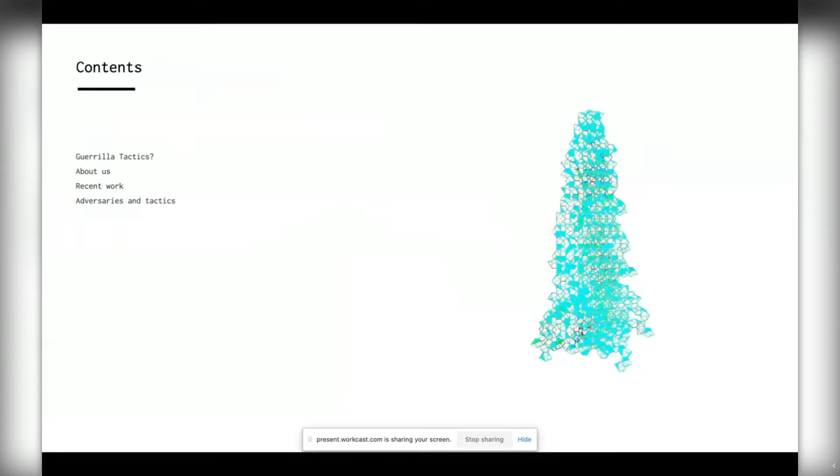Guerrilla tactics. There's a couple of definitions of guerrilla tactics. Wikipedia, the top quote, talks about avoiding head-on confrontations with enemy armies, instead engaging in limited skirmishes with the goal of exhausting adversaries and forcing them to withdraw. So we talk about what our adversaries are, but the RIBA, the bottom quote, has a slightly softer, more appropriate approach, talking about winning by collaborating, leveling up skills, pooling knowledge, and how digital relationships can transcend local networks. So there's a bit of both in there.

I'll flesh this out in a second.

Firstly, about us. Format Engineers are a relatively new practice, formed in 2014. We think we're slightly unusual in that we're structural engineers, but the various people here have backgrounds in architecture, mathematics, geometry, coding. For example, we've got one guy who works part-time for the software house McNeel, who publish Rhino, which a lot of you may know. We do lots of research, so we like to think we go beyond the narrow discipline of structural engineering.

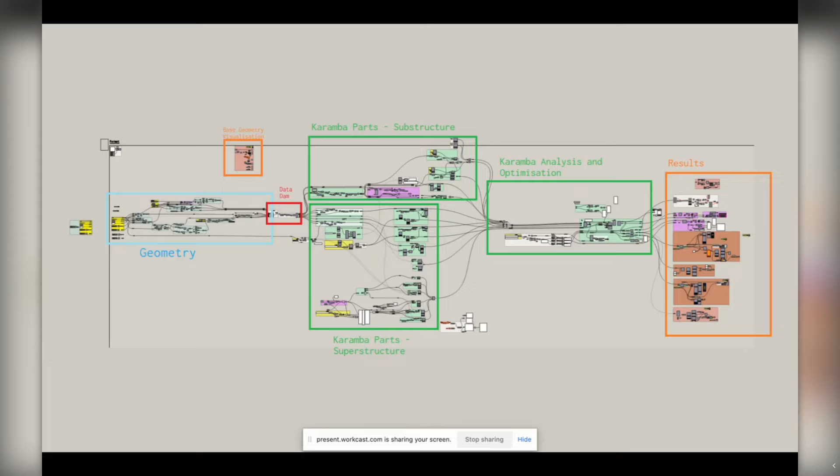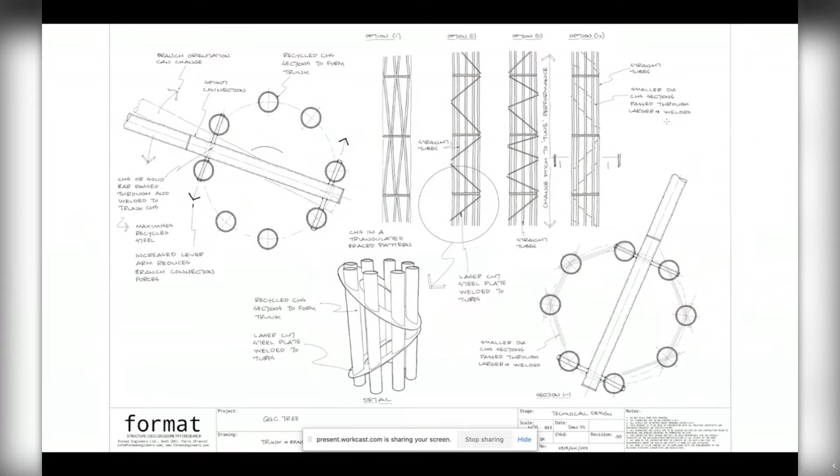But you'll also equally hear about first principle sketching and just disgorging the problems in your brain by the physical act of sketching. That's something we beat into people here. It's very, very important, it's not about jumping on the computer. I should also go back to the computer point and say, computing for us is not a philosophy, not a mindset, not an ideology, it's a tool. I lectured a bunch of architectural students yesterday, and I was ranting on about how computational design is not an ethos. It's a tool like a pencil, and it absolutely is. It just enables us to design better, leaner structures quicker and collaborate more easily.

And there's also hopefully lots of talk of practicalities. We pride ourselves on building things, and we pride ourselves on not just being the kind of engineers that say, oh, we do scheme and concept designs. No, actually we build the whole lot, because we're very keen that what we learn from building feeds back into the design process. So practicality is something which shoots through all of our work.

Just again, to set the scene, some of our recent work before I dive into the Guerrilla Tactics. Last year was quite an interesting year for us in terms of art. We were very lucky to deliver quite a lot of projects in quite a short space of time, and we'll talk about these in more detail.

Top left, Goodwood Festival of Speed. Top right, London Design Festival last year. Bottom left, the Tay Whale in Dundee, next to the V&A in Dundee. Bottom right, Marble Arch Place. So those are all things that we were lucky to deliver last year.

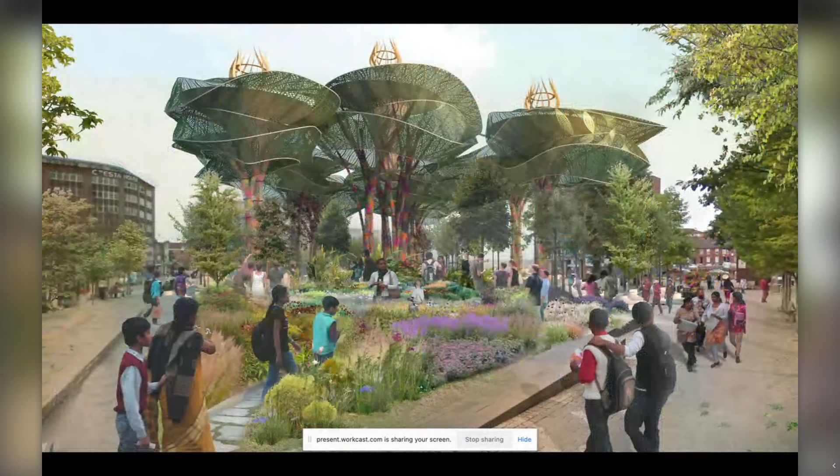We're currently working on a number of quite interesting art projects. I'm sure many people on this call may have worked on similar structures, but we're working on a series of structures for a UK-wide festival this year, which was originally dubbed Festival of Brexit - I think it has a more palatable name now. We're designing a number of enormous tree structures, located in Birmingham and Edinburgh, to reflect and illustrate biodiversity as well as urban diversity. We're working with a really nice team of people on those projects.

We've recently completed a very visual demonstration of climate change ahead of the COP26 conference, where we designed a sinking house. It's a sleight of hand - this is anchored next to the historic Pulteney Bridge in our hometown of Bath. All the flotation calcs were us, all the calculations proving this wouldn't float down the river and crash into lots of boats, all by us.

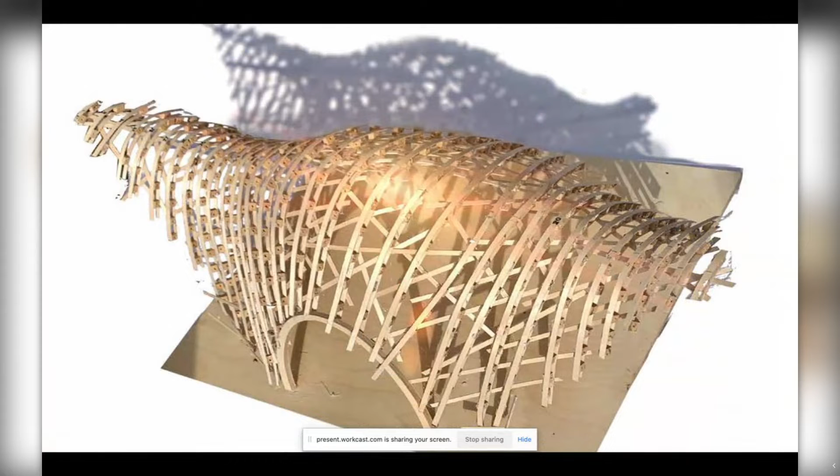Timber lattice shell at Westonbirt Arboretum with architect Piers Taylor. We do our own footbridges - we're working on a number of contemporary bridges at the moment. I think all of them are designed in-house, actually. Oh, there is one with an architect - I'll take that back.

We don't just work on art projects, we work on a number of slightly more conventional projects, although they tend to have a twist to them or some unusual aspect. We work on a number of contemporary houses with long span cantilevers. We're working on a power station, for example, in the west of England - that's a huge project, again quite unusual shape. So we do tend to get involved in some quite interesting projects, which is something we're very proud of.

We're working on a series of huge advertising structures in Qatar ahead of the World Cup this year. We do a lot of staircase designs, which is actually a lot more sexy than it sounds, in that we do lots of work for a steel fabricator doing staircases, which is great because we learn a lot about steel detailing and we've learned a lot about dynamics. So from an outwardly relatively straightforward set of work, there's some really interesting conclusions in terms of automating this process and understanding dynamics in quite some detail, which we apply to some of the works of art that we do.

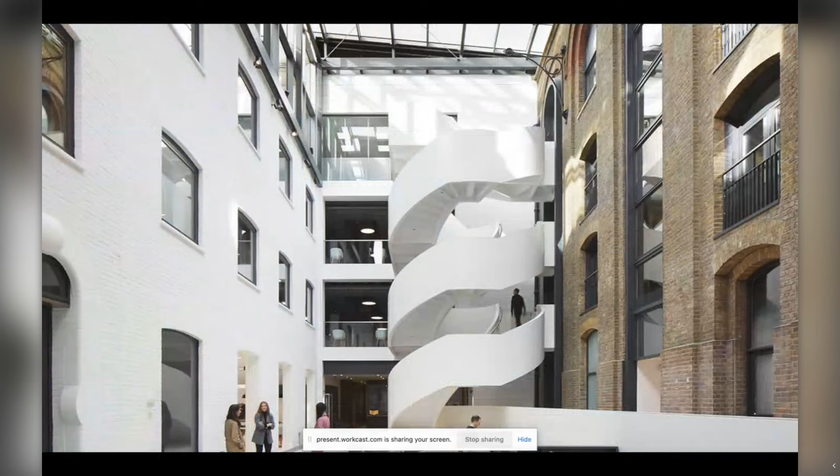There's another staircase to illustrate the point. We've done some work with English National Ballet recently on their stage sets. We've done a lot of work at Foundation Lafayette in Paris on various works of art there, and we've done a number of things at the Orange headquarters in Paris. A lot of these actually led to our office in Paris.

So, Guerrilla Tactics - just to recap. We talked about exhausting adversaries and forcing them to withdraw. We talked about leveling up skills and pooling knowledge and collaboration. And then this is the RIBA softer interpretation of this, and how digital relationships can transcend local networks.

So if in the context of this presentation, let's say adversaries are unusual materials - it could be the behavior of the material, or the structure is too complex to model. It could be how do we communicate, or it's too complicated to build, or quite often what happens is there's too little time to build it - that's a very common one in works of art. Some of the tactics we developed are developing our own in-house tools, developing a particular mindset, a very can-do mindset, techniques which simplify the build, and a smart workflow and collaboration.

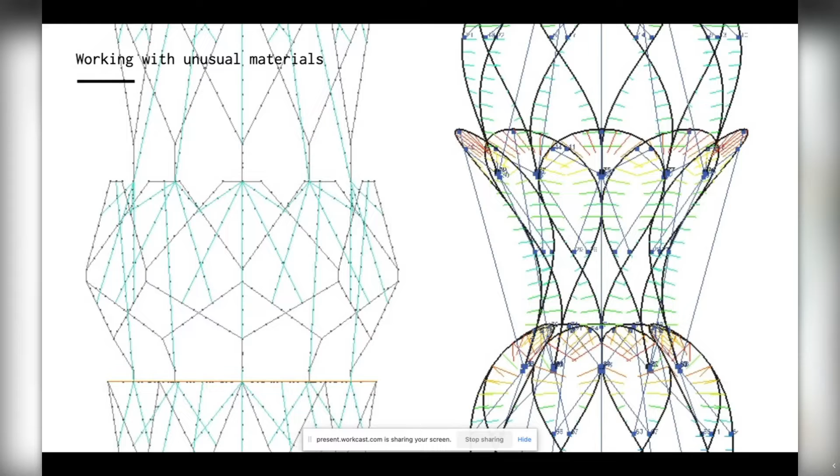So the first one: working with unusual materials. What I'll mostly do is use projects to illustrate this. A lot of the work we do stems from my colleague James's work at ITKE, where he was responsible for the Elytra Pavilion - this is at the Victoria and Albert Museum, but it was also moved to Shanghai and the Vitra campus. So we've developed a pretty good knowledge of carbon fiber.

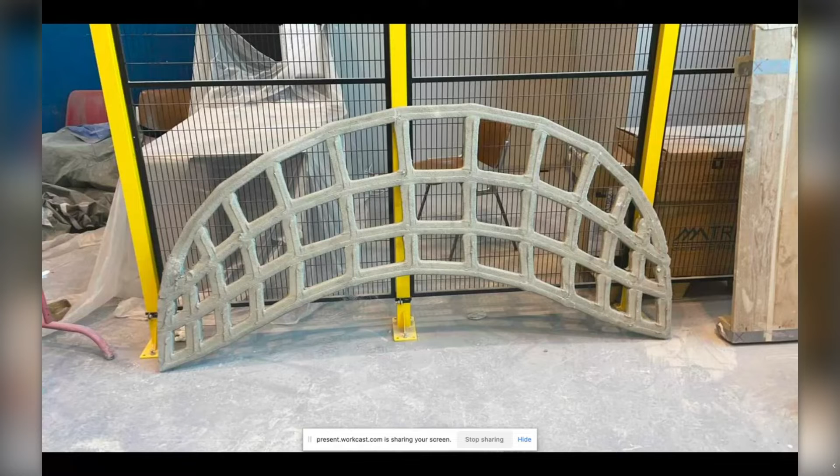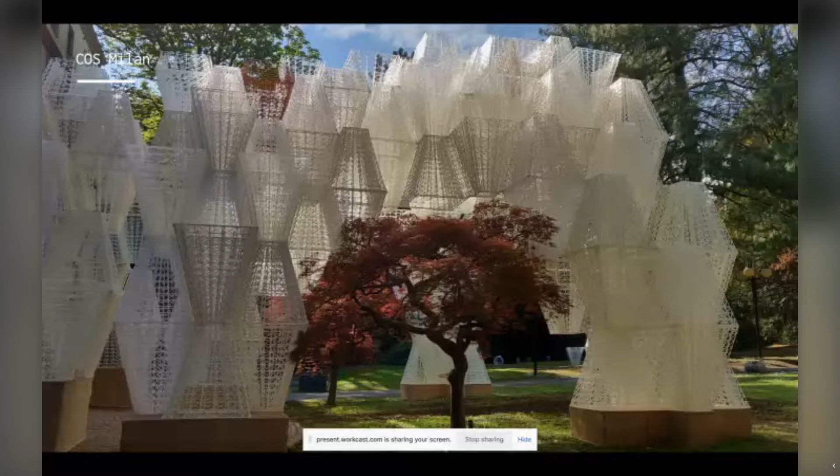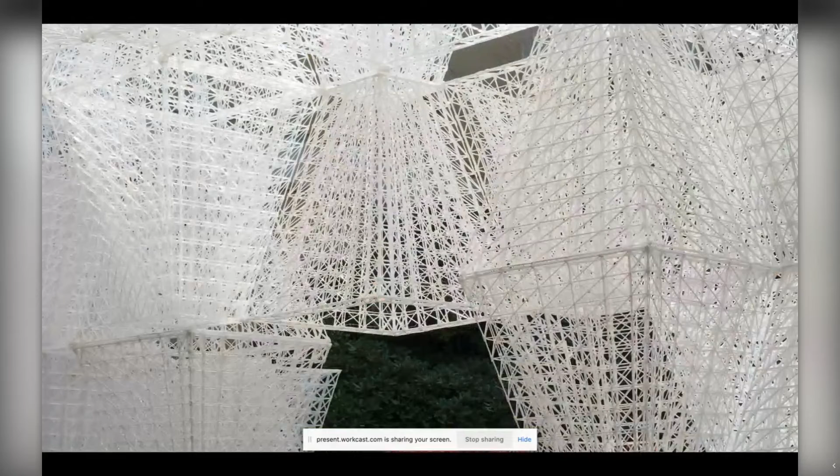But how do you deal with these materials? They're often not codified. One quick example of this was a project we did in Milan a couple of years ago - a 3D printed bioplastic pavilion. There's a bizarre statistic claiming it's the world's largest recyclable bioplastic structure, which is a nonsense statistic. But each of the structures is made from a series of baskets - flat 3D printed bioplastic elements which are then linked together. So you can see it's all flat elements here, making one whole.

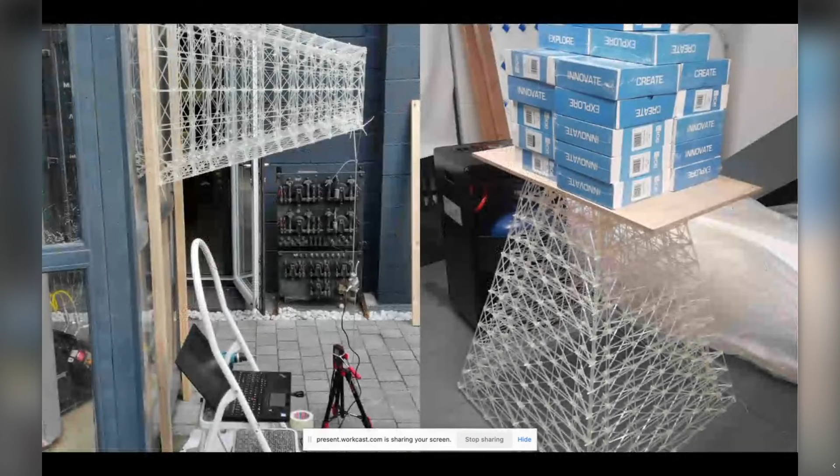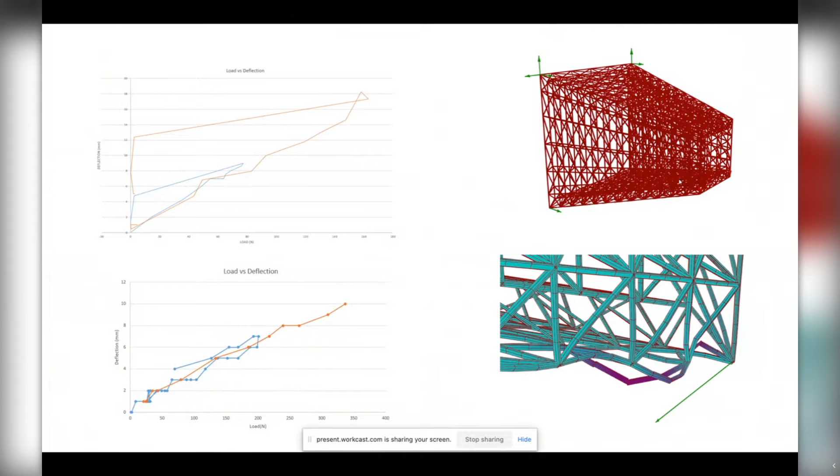So how do you deal with this? One way is the classic engineer's relatively low-tech testing approach - put in some strain gauges, measure the materials and how they perform as a system, load them, and gain data that way, which is what we did on this project. We were able to look at the performance of the structure, where it was likely to buckle, and how we would reinforce and deal with those elements.

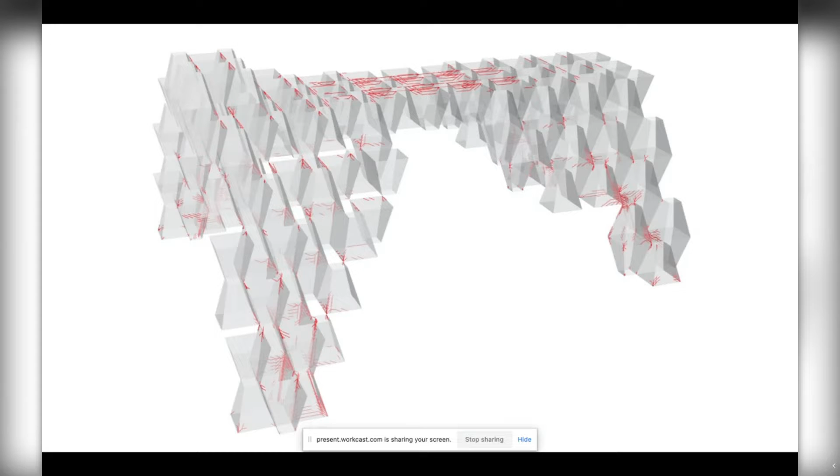But the essential gist of this is that, through computation - apologies, this diagram is hard to read - we were able to put every single member into our structure, and there must be millions of members here, just a large data set. By importing the geometry as a 3D model into computational scripting, you can analyze it and get results, then make decisions about the script, letting it automatically orientate members in different directions. The red elements are the ones that were failing - there's far fewer failing now, just by a simple flick of switches to orientate them differently, you get far less failure.

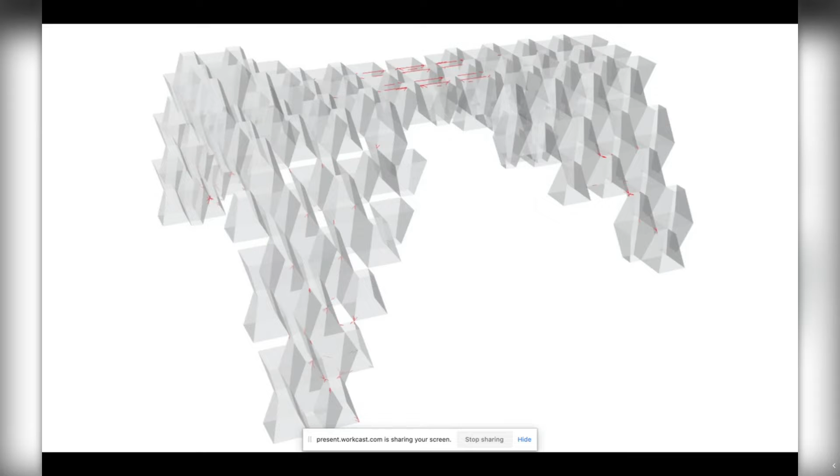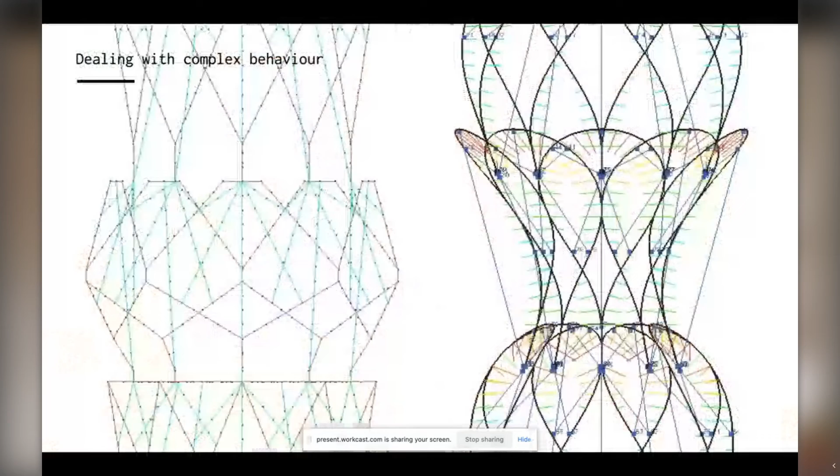So that's complex materials - digging down now to complex behavior. Some of these works of art are extremely complicated or don't obey the normal rules of beams, columns, etc. How do you mimic those? How do you simulate those with confidence?

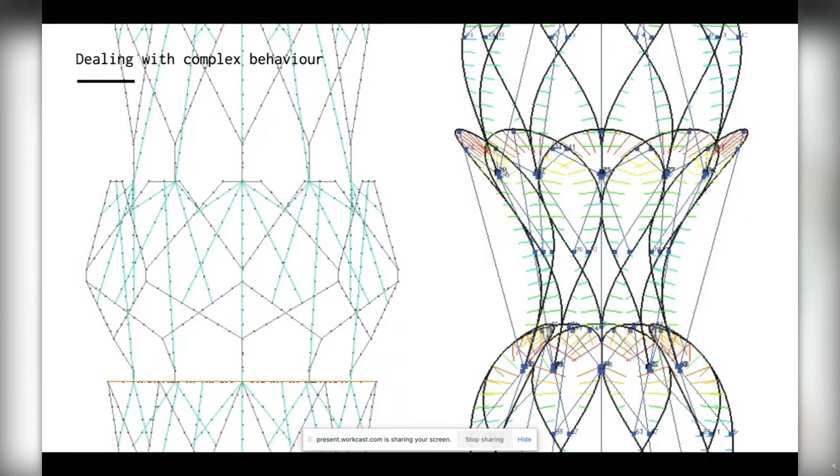One of the tools we've developed in-house, along with researcher Cecilie Brandt-Olsen in Copenhagen, is a toolset which sits on top of the Kangaroo plugin for Grasshopper, which itself is a plugin for Rhino. Apologies if this sounds like gibberish for some people, but essentially it's a way of simulating real-world physics in a digital environment.

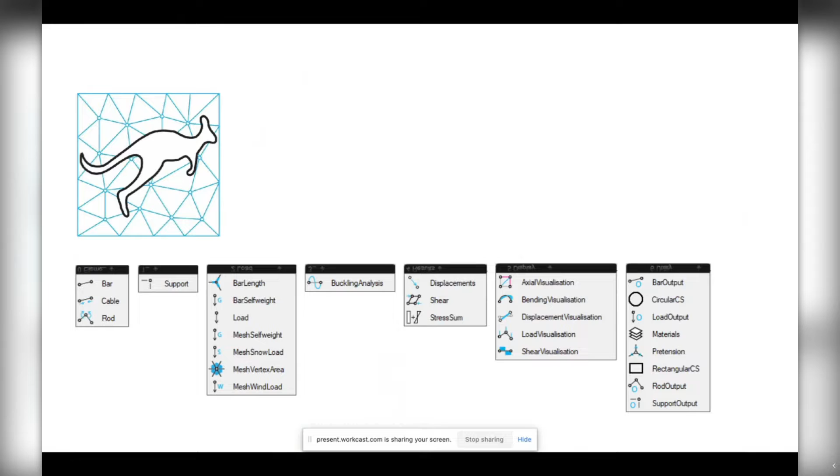Our plugin, called K2E, is essentially a structural analysis plugin. It lets us analyze very lightweight, very filigree structures using real-world physics, so we can look at things like the bending active behavior of an element, and what the bending stress is when it's pulled together. So very lightweight structures, and the first thing we ever tested this on was a structure at the University of the West of England.

A very simple timber pavilion, built a number of years ago - I think this was the first structure ever to use that plugin. It was a series of bent active plywood strips. How do you analyze the stress in those strips? Conventional engineering software struggles to do that, but ours doesn't. It instantly tells you what the pre-stress in those members is, and most importantly, what shape they will take up. So that was an important test, just one example.

We developed a tool to actually mimic complex behavior. Another example is where we've developed our own CFD plugins. There are a number of CFD plugins out there that enable you to check and visualize the effect of wind or a fluid upon a structure, but we developed our own on the back of the OpenFOAM open source movement. It enables us to check some of the more complex interactions between structural elements. I'll come back to this at a later stage.

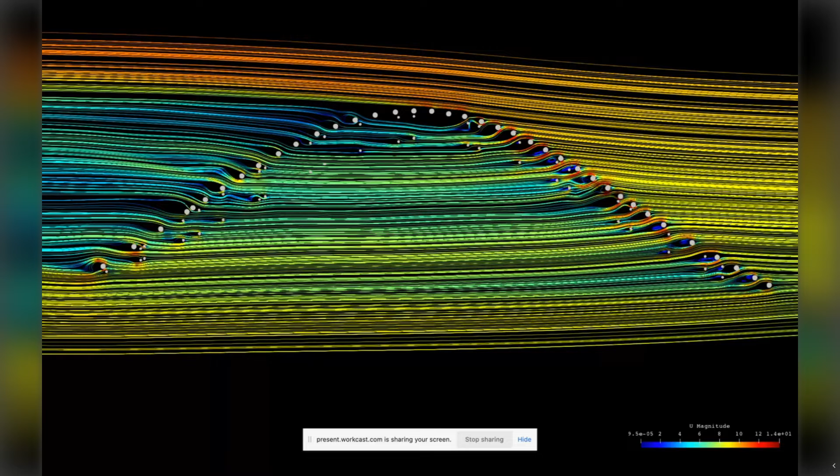So to illustrate one example of complex behavior and the tools we used to deliver it - in this instance, the same K2E plugin I've just mentioned - this is Goodwood Festival of Speed. For those who don't know it, every year there's a festival revolving around cars, motorbikes, anything fast, near the south coast of England, and they always have a big centerpiece structure.

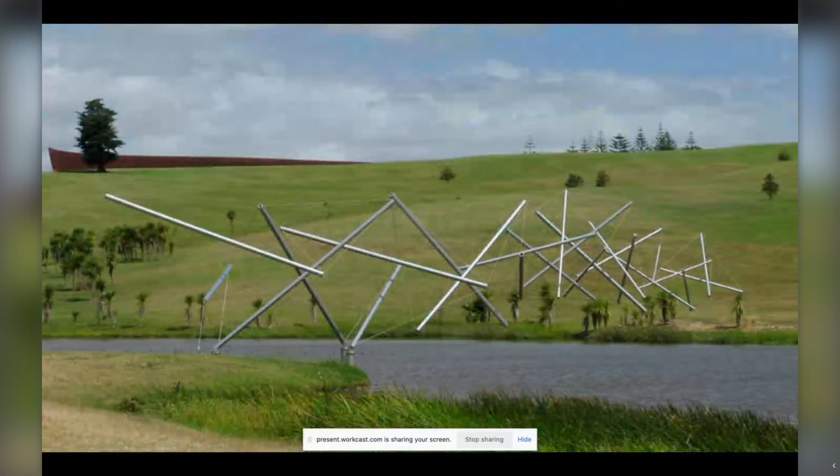This is the first time we've been invited to do it, and we were invited by Artists Unit 9, whose task was the world's longest tensegrity cantilever. So when we first started talking to them, the debate was: what is the world's largest cantilever? What do we have to beat? Now the one we found, and there could be more out there, was this one by an artist called Kenneth Snelson.

Kenneth Snelson was a pupil of Buckminster Fuller, and he did a number of tensegrity structures - we think this one is in the States. The joke is that we read the description on the internet wrongly - we thought this was 35 meters, so we were fixated on making our structure at least 36 meters, firmly the world's longest. It turns out this one was actually 25 meters, so we massively overshot. But hey, if you're going to do it, go for it.

And the original artist's instruction to us was something like this: a tensegrity structure which is a bit wibbly wobbly, a bit snake-like, undulates, has some randomness to it. We drew the scorpion on top to make fun, as you do.

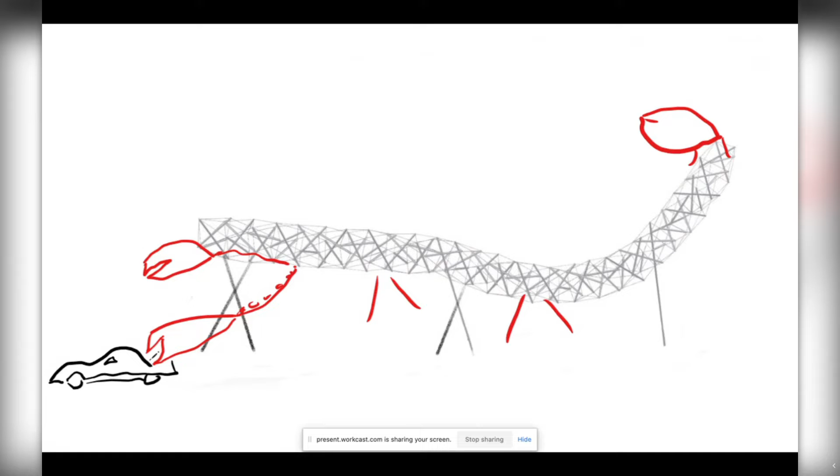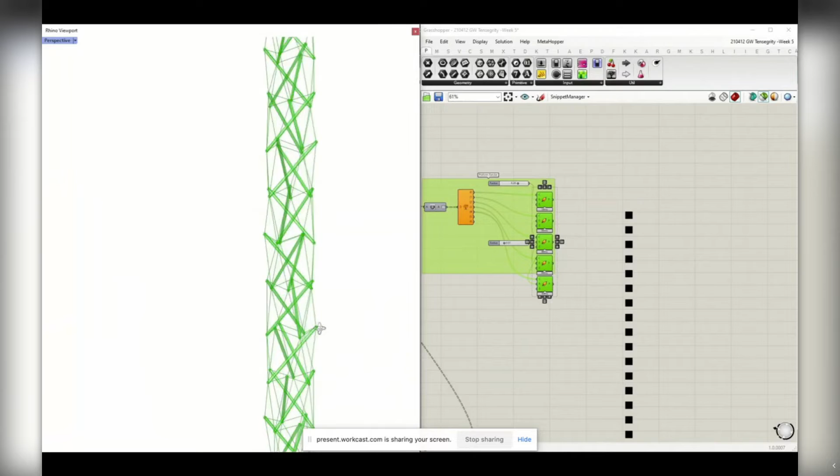This was quite a nice collaboration with an artist, and they gave us a lot of freedom to determine the shape. So we said, okay, it needs to be a cantilever - how do you simulate a cantilever? Using computational design tools, we're able to build up this tensegrity structure from a series of modules. We're able to relax it under its own self-weight, generate this structure, and add a certain amount of randomness and wibbly wobbliness until the artist was satisfied it was in line with their vision.

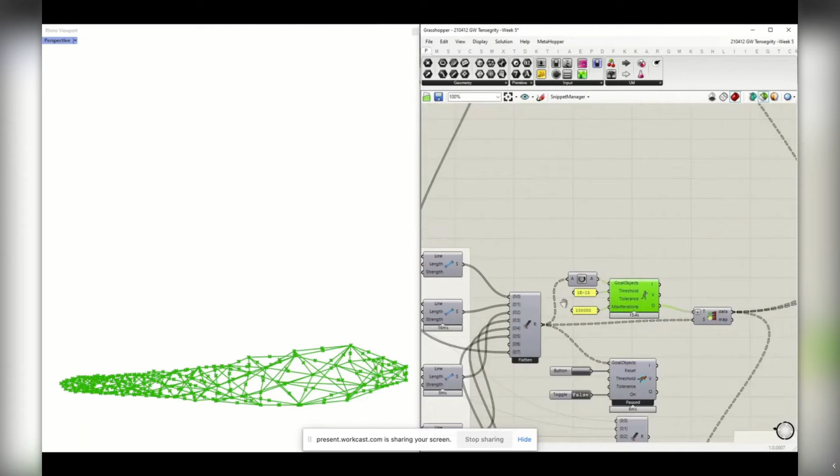There was then a whole series of figuring out how to make this - we lay it flat, and work out what kind of pre-stress is required to actually keep it in a stable configuration, what form it needs to be preset to. So a lot of this work is all about simulating those forms. This always gets lots of sniggers, apologies - but you allow this to generate form, and there you are. That's how you generate a tensegrity structure.

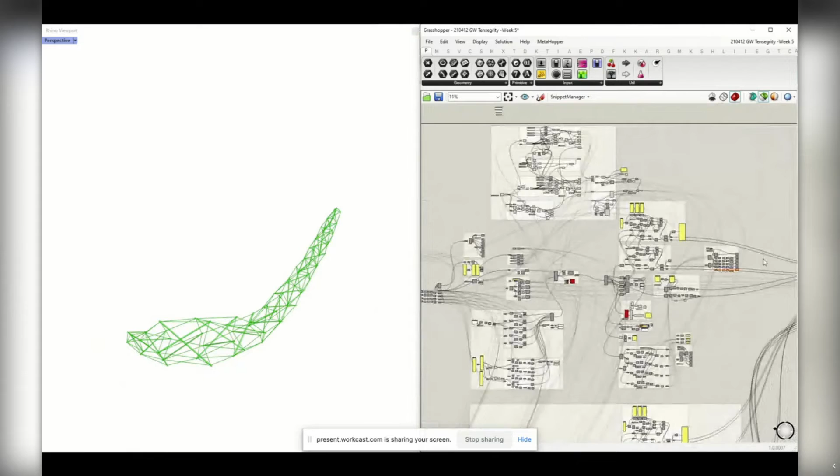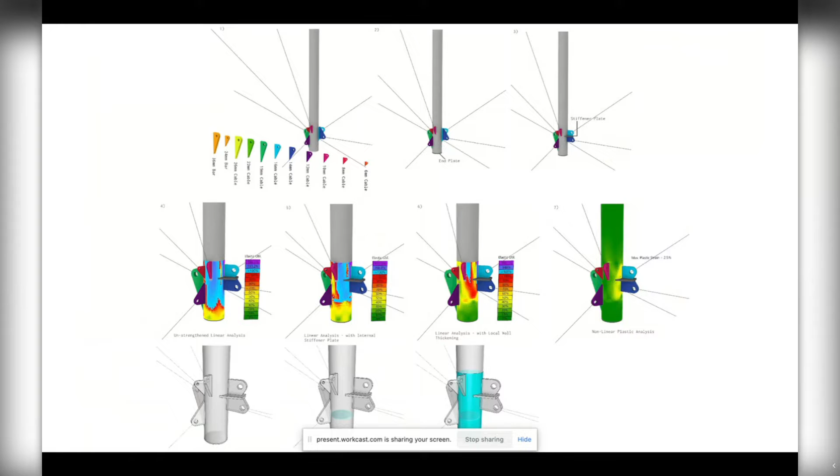One of the beauties of this, as we talked about with the adversaries, is not just complex behavior, it's lack of time. We were given a couple of months maximum to design the world's largest tensegrity structure, get it fabricated, and build it. One of the ways we did that was to automate all the joint calculations, all within the same scripting environment. So whatever parameters of the structure we changed, the joints would automatically recalculate - we could see the stress in the joints and play around with different configurations and add stiffness, all within the same parametric environment.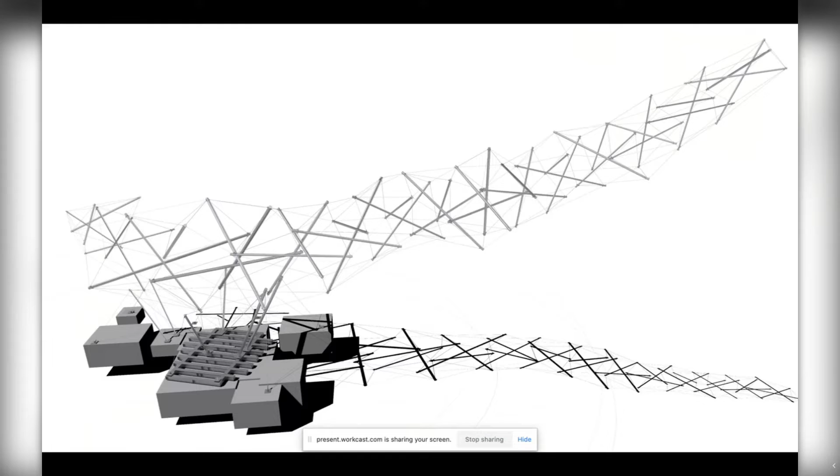And there are all the connections. All the fabrication drawings were done by us, and again were all spat out of the same script to keep it super quick. That was the final structure, the 3D image of the final structure. It started fabrication. That was all fine.

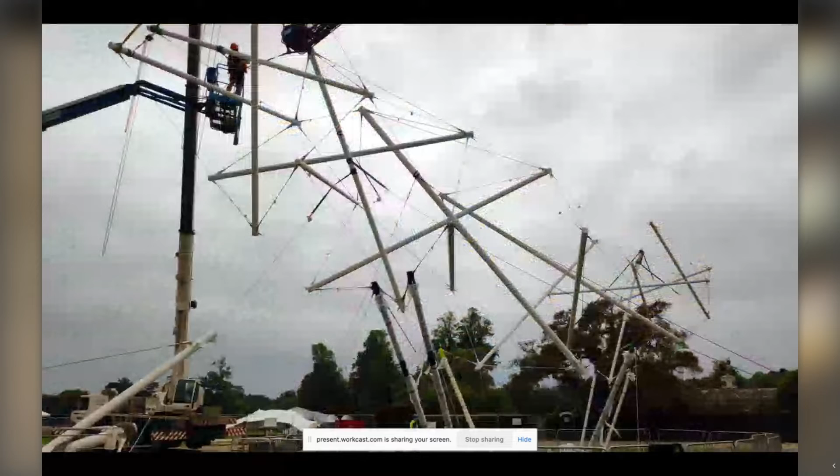That was all good. And then it got to site, and the contractor we were working with was Littlehampton Welding, who are a brilliant steel contractor. They do some amazingly complicated things. And I think this was the first instance we've had a phone call at the weekend from the contractor saying, help, we've never failed to build a structure. Here, we might well fail because the clock is ticking and we're trying to build this 3D object in empty space. How on earth do you do that?

So one of the things we've heavily invested in and researched is the use of augmented reality. Again, some of the tools fit within the computational design environment. There's a company called Fologram, an Australian company who do lots of work on this, who we've collaborated with before. So we put the Fologram system on a series of iPads, a laptop, and we went to site.

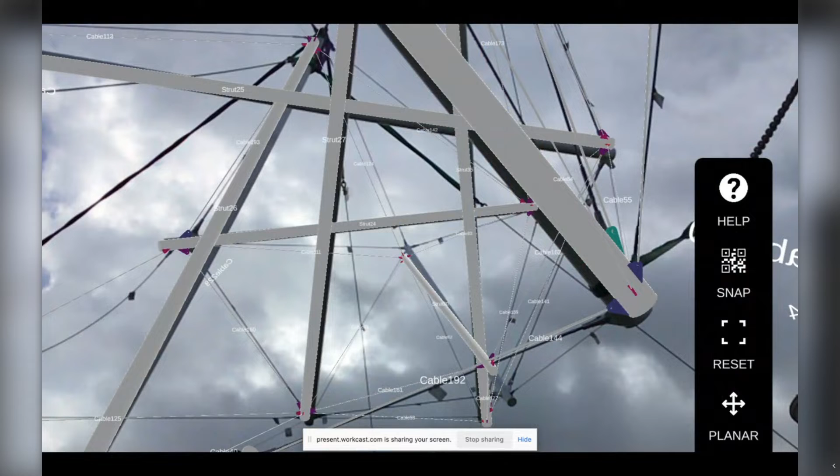So we were able to see the structure, how it should be in relation to how it was. That allows you to guide the contractor and say, well, that's not the right place, that should go over that one, that should go under that one, etc. And here you get a better sense of what that looks like. So the use of augmented reality here was absolutely crucial to getting this done on time.

That was the final structure. Some of the detailing. That's the festival. So it was great fun. It was quite stressful. It was a very quick program, and without the tools that mimic the complex behavior, and the tools to allow us to spit out things like fabrication drawings and joint detailing super quickly, it couldn't have been done.

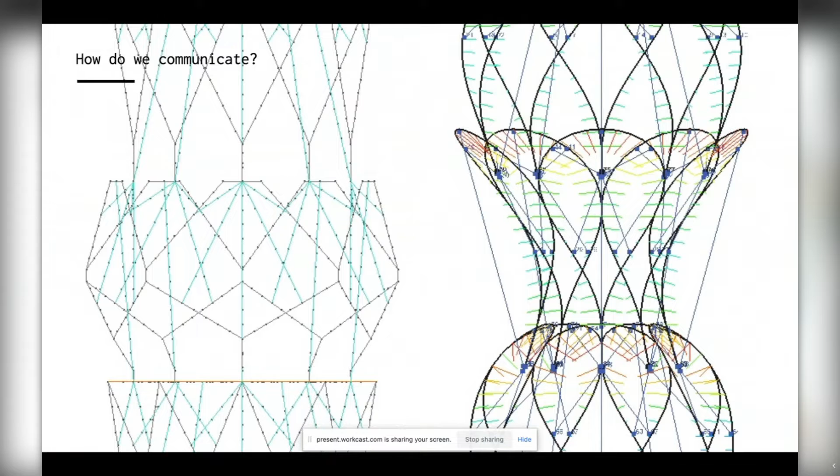How do we communicate? How do we talk with artists to get over this problem of, I mean, my God, this is complicated. Tell me, what's the best way of proceeding from a blank piece of paper?

One example is the Dundee whale I talked about before. This is working with an artist called Lee Simmons. What Lee wanted to do is stick to a very, very pure whale form. And what we wanted to do is put a structure in there, which is an actual two-way spanning structure. But it's very difficult to communicate in and sort of sketch options as to what the layout of that structure could be in 3D.

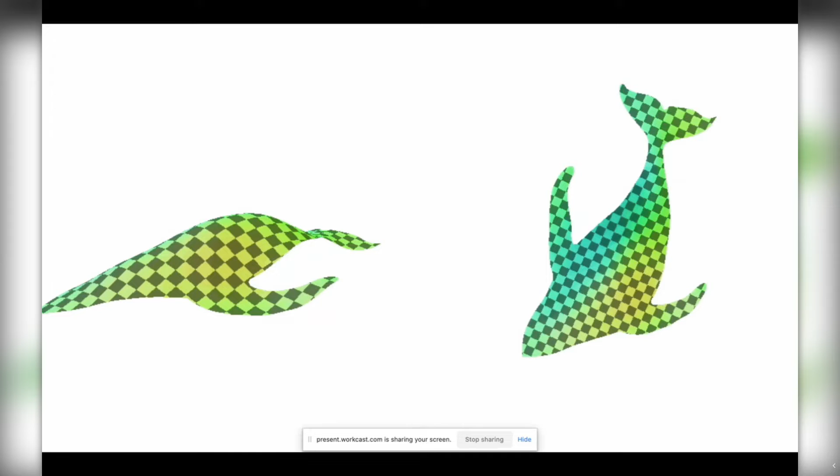So we used the work of a mathematician called Keenan Crane, who's at Carnegie Mellon, I think, to actually use his technique called boundary first flattening. There's one animation, this is probably a better one. Boundary first flattening enables somebody to draw on a 2D plane. So here, we would draw a grid, cycling through grids of structure that the artist would find acceptable, which then get translated into an accurate 3D object, where all the angles between the members are all preserved.

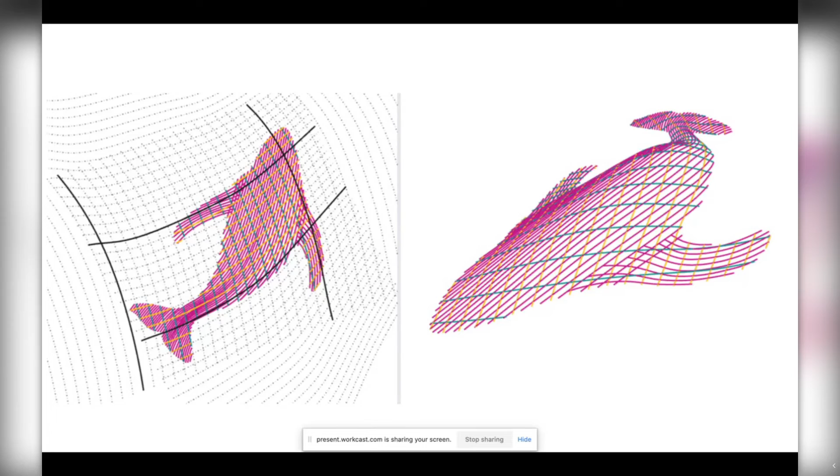So we gave the artist this tool, so he was able to say, this is too dense, this is too light, I'm happy with this. Again, it's the use of digital technology to communicate that's super key.

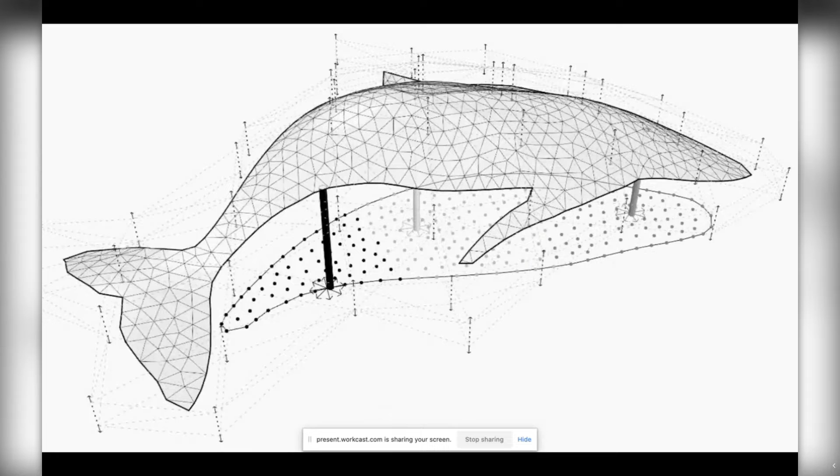Then just to continue this project, another thing we did, which is pretty classic in the digital design world, was to move the supports around until we find the best configuration of supports that give maybe the least stress or the least deflection in the structure. We're also able to move the global shape of the structure such that we can control the deflection. So here we are looking at different configurations of form, subtle changes in form, just to reduce the deflection.

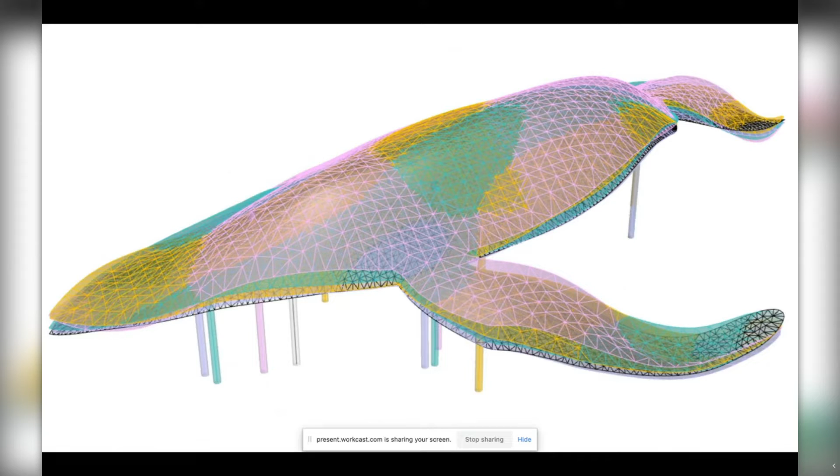If you compare the original, which might be a little fuzzy for some of you, the black mesh, with the final one, the pink mesh, they're pretty similar, and it still obeys and still looks like a whale, but the deflection was four times better. Now, four times better doesn't necessarily translate into four times less material, but it's a hell of a lot less material, and it just works a hell of a lot better. So, again, use of digital techniques, good stuff.

How do you build it? It's a very complicated thing to build. You've got all these tubes which are all possibly double curved, which is very, very expensive to fabricate.

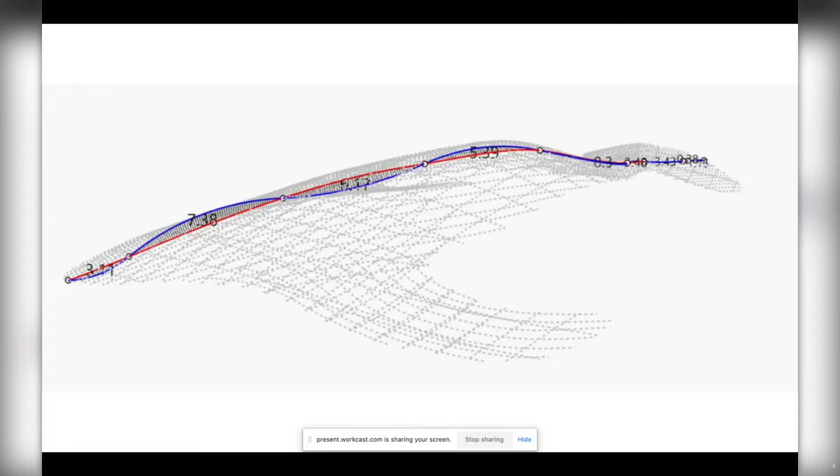We've developed a series of techniques to decompose double curved tubes into lines of single radius arcs, which plugged together are a very precise approximation of the original tube. Single radius arcs are much cheaper to fabricate, so that saved a lot of money on the project.

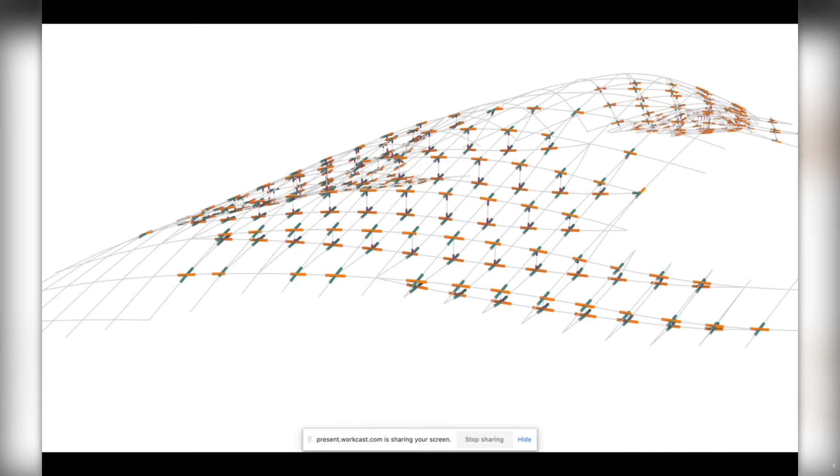Talking about the workflow again, the clock was ticking - we had to get it done before the winter storms set in at Dundee. Every joint was calculated separately. There was a workflow set up where the forces from every single connection were exported to a finite element package and a joint design package automatically, so we could check all of them. That was a huge time saver.

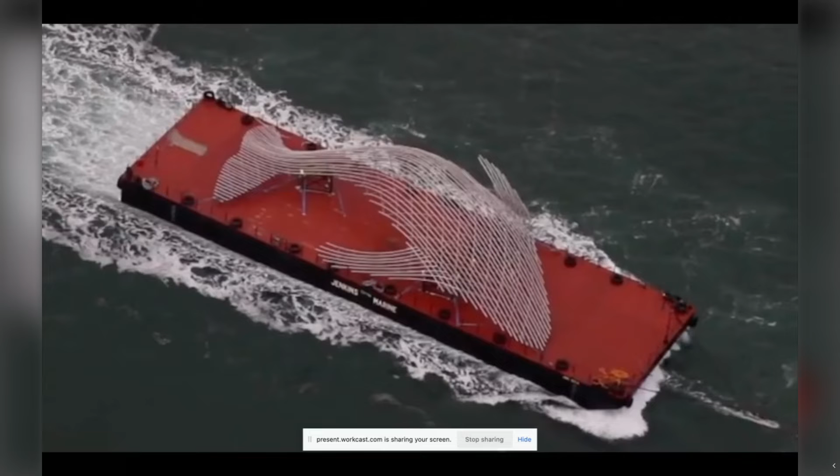The thing was fabricated on the South Coast because they are the best fabricators in the country. The site was in Dundee, so they put it on a barge and took it all the way to Dundee, where they built it. The artist had an exclusive deal with the Daily Mail to film it as it went around the coast. It was built, and it looks great - a great project, with lots of really nice local press as well as the Daily Mail.

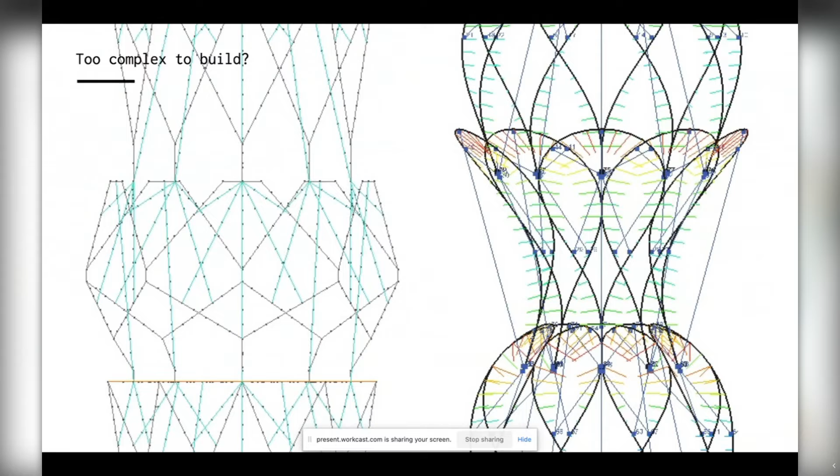I talked about this before, about things being too complicated to build - like, my God, how on earth are we going to build this? We'll never pull this off. So what guerrilla tactics do we need to confront that fear?

So all very complex forms - how on earth do we pull this off? And I also talked about social building, enabling what is outwardly a complex structure to be built by people who are not professional contractors.

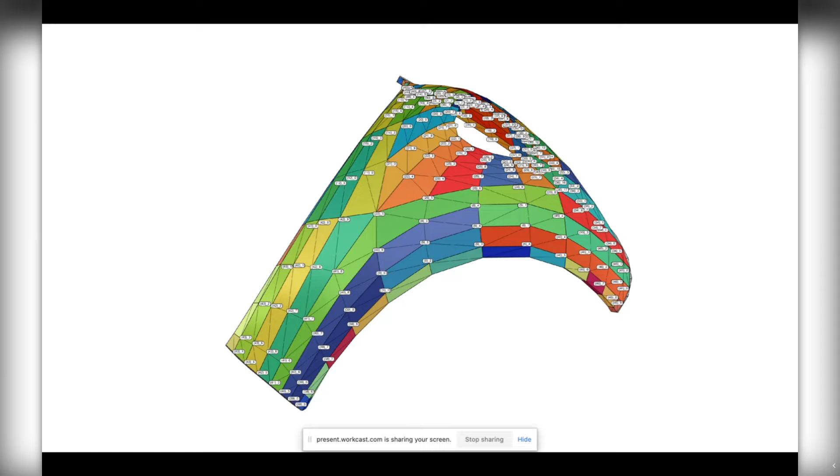We're working with a very enlightened client in the southwest of England who has a huge master plan for a site. He's obsessed with concrete shells, which is fantastic for an engineer. This is a prototype small shell - we're using glass textile reinforcement, and through scripting and geometry manipulation we're able to subdivide the surface into simple cutting patterns. He himself can literally cut them with scissors and put them on, in this case, a clay mold for the shell. And there's the cutting pattern.

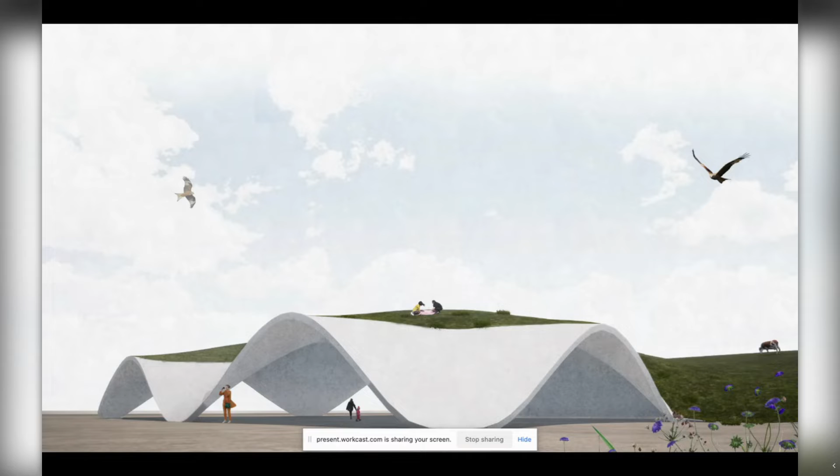This leads to another project on his site, an even bigger concrete shell - the small shell is currently in construction, and it's a prototype for this bigger shell, which will also use glass textile reinforcement. Hopefully this would be done this summer.

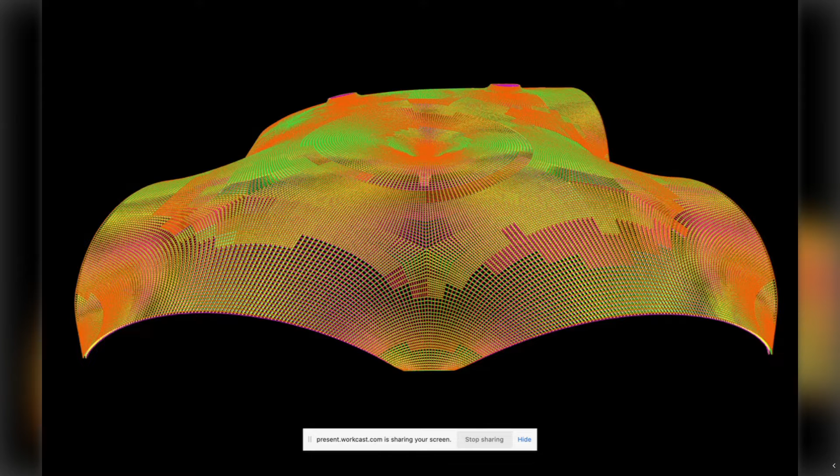Some other ideas flowing from this include modeling the reinforcement in this shell - there's a whole separate presentation I could give on the research and technology behind how we align the reinforcement. But modeling the reinforcement and using augmented reality to place it, that's one of the suggestions.

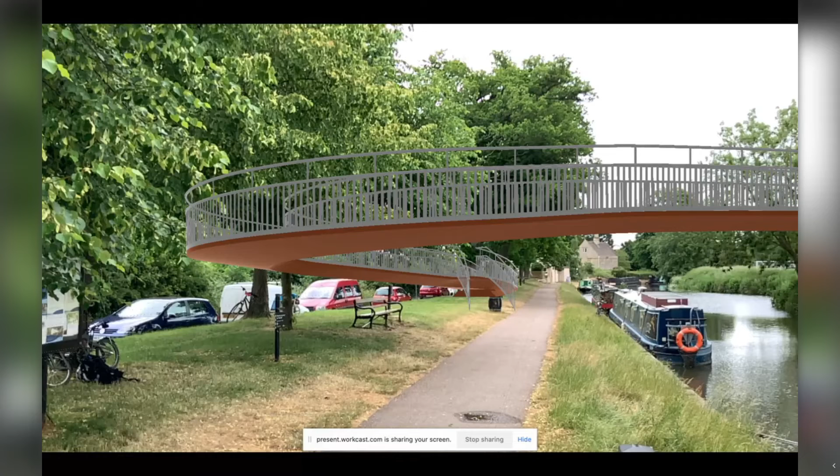What is very applicable is what I showed you before in the Goodwood structure: augmented reality, used on one of our footbridges. We can go to site with an iPad, a computer, or a Microsoft HoloLens headset, and see the real world as a background with your structure overlaid on it. In this case, we cycled through different variations of the parapet to show the client how it would look, and you get instant buy-in - the client says, I can see it now, that's really cool. We've used that on footbridges and other structures a number of times.

One good example of the philosophy of reducing complexity to make things simple to build was a number of timber cabins we built in Hammerfest, the most northerly city in the world, in the Arctic Circle in northern Norway. One site is on top of a mountain, and the other cabin is on the opposing mountain peak.

There's one computer model, one script. We took the architect's original vision of a curvy, egg-like shell structure and changed the form quite a lot to make it more structurally efficient. We broke the surface down into simple flat panels of timber that someone without a huge crane or equipment could carry up to site on their back. We set up all the screws within the same model, so one person knew exactly where to screw this together, with all the analysis in the same model too.

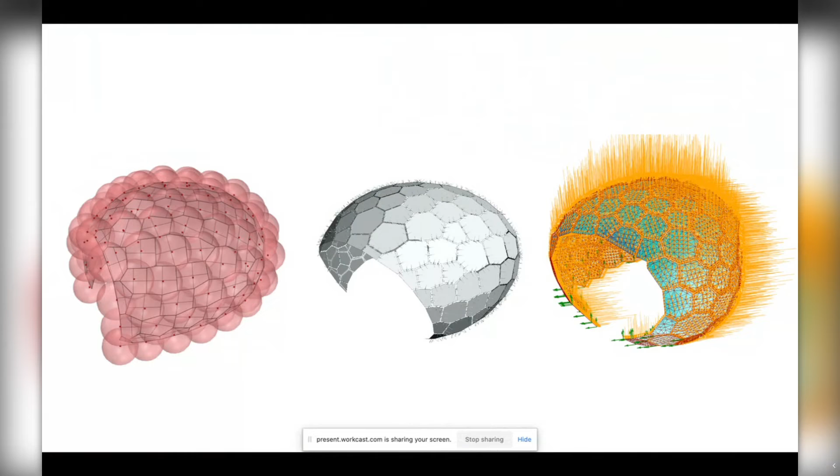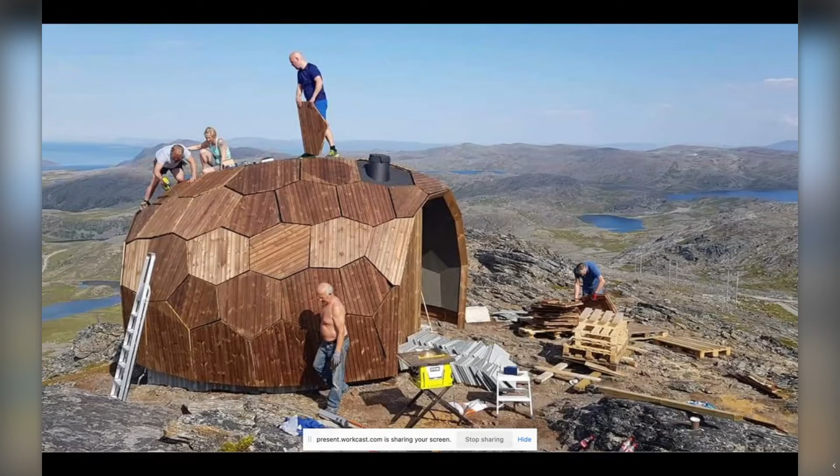The first cabin took about 4 days to build, and the second cabin took 2 days. Again, it was just through clever planning of the joints and the elements, so they were small enough and light enough to cart around easily, meaning these people - who are not carpenters, not experienced contractors - could build something of value for the community themselves.

Another project which exemplifies these techniques of reducing complexity, while addressing how to build something outwardly very complicated, was a pavilion for the architectural Biennale in Tallinn, Estonia. It was won by architecture students from the Bartlett, in collaboration with the Australian Augmented Reality people I mentioned before. The academics from the Bartlett didn't expect to win - they entered just as an exercise, and lo and behold they won, and then were expected to deliver this quite mad shape they had created.

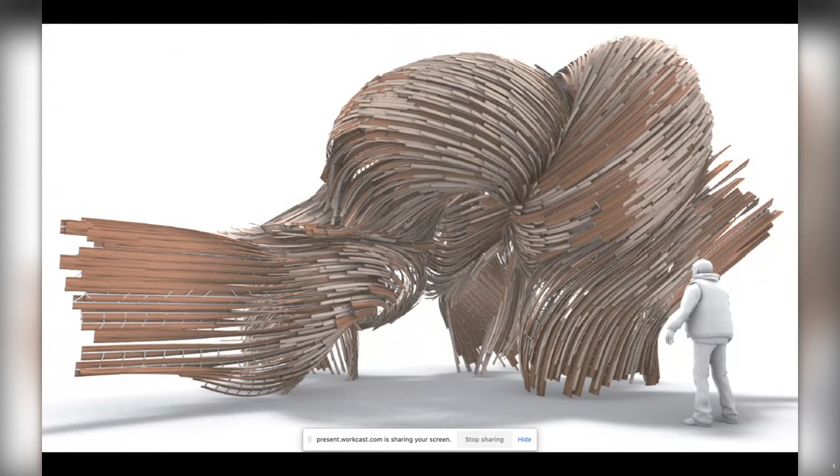So they got in touch, and we talked about how we could break this structure down to its essence and how we could build it. There was lots of hand sketching of ideas, the various challenges, and how we could hold this thing up. Communication was key - sharing a common 3D model on a common platform, we were able to reduce this down to two elements: the timber planks themselves, and...

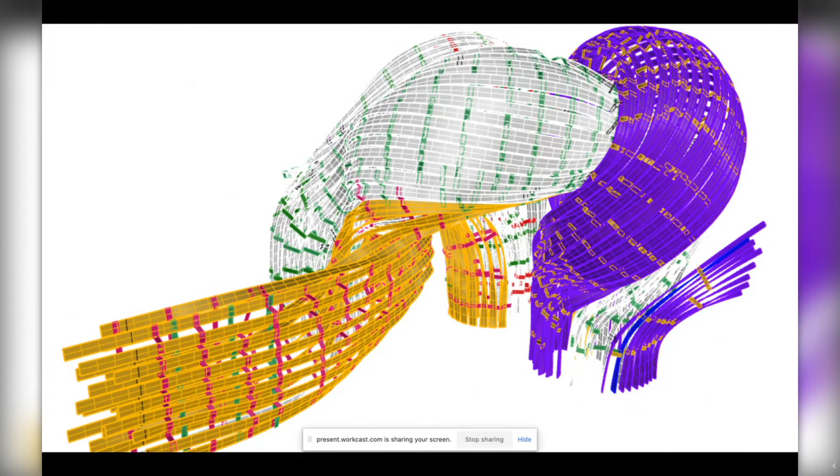It's important to know this pavilion is called Steampunk - I should have said that before. It's called Steampunk because all the timbers are steam bent. So it's a series of very simple but steam-bent timbers, and a series of relatively complicated folded steel brackets which hold the thing together.

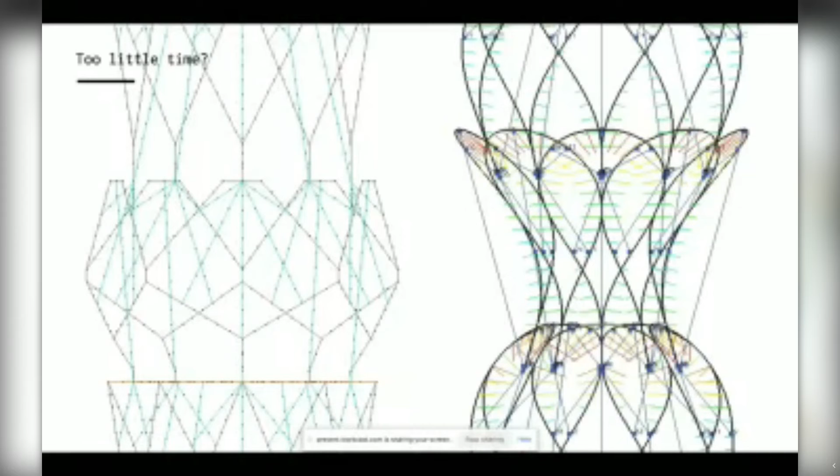So another adversary, and there aren't many more to go, so apologies - another adversary is too little time. I mentioned too little time before, and I think most of our projects probably have too little time, to be honest. The Goodwood project I talked about before, that was an amazingly quick timescale. We talked about how we can use various techniques to help us do things quicker.

But another example of too little time was the London Design Festival Pavilion at the Victoria and Albert Museum last year. Architects Nebbia Works, who are all ex-Thomas Heatherwick, won the competition to design this very, very elegant, very refined, very sharp, literally sharp, aluminium pavilion.

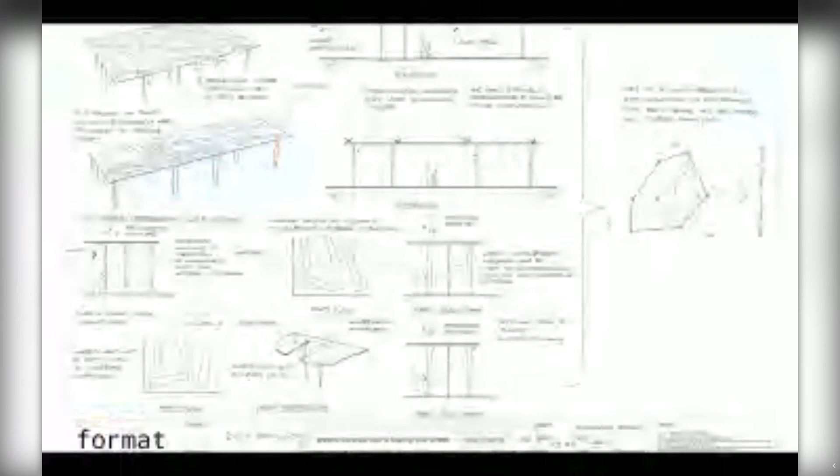Again, a whole bunch of hand sketching to sort of isolate the problems and come up with the various solutions to this. Lots of computation to rearrange the structure automatically to get it to perform better. So here we're moving the legs around and the cuts. Each of these legs is formed by being a cutout from the sheet of aluminium and then bent into place. It's a very simple concept, but quite an elegant one.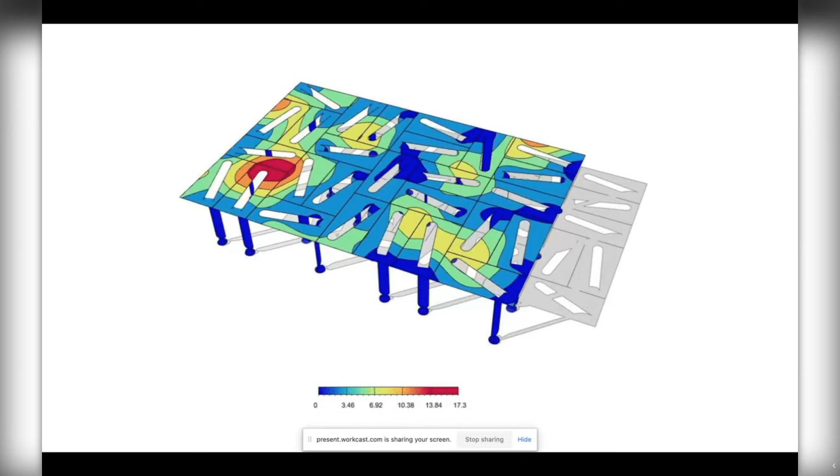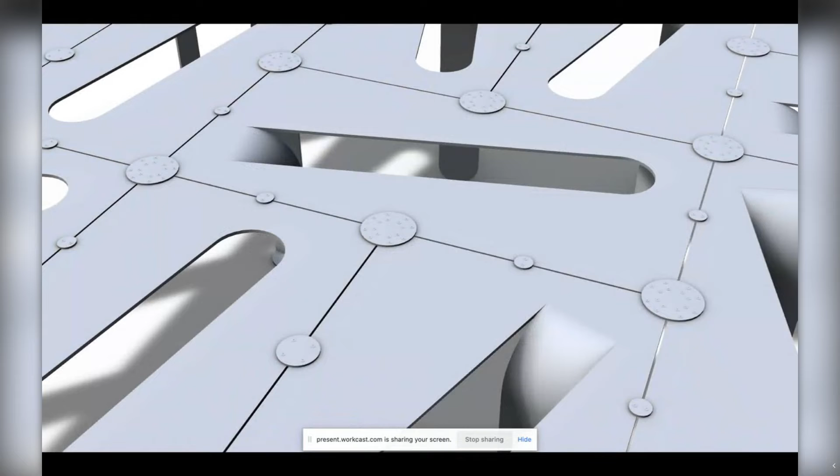So we simulated that, but we also simulated the bending stress of the legs itself. I think that was an important thing to do. That was the final model - that was the intent. Very nice clamp details at the top, and we were all very pleased with the little bottom feet as well - very elegant little feet on a literal sort of single pin at the bottom.

One thing I mentioned here is embodied energy. Now most of our structures, in fact I think all of them from now on, we compare different options using the data set from the IStructE, within our own Grasshopper plugins to look at different concept designs and the impact upon the embodied energy of the different decisions at the concept design stage. We now do that every project if we can.

This was a particular example of that, because aluminium is traditionally pretty bad, but this is a very new aluminium product. They use, I think, a different smelting process to produce an aluminium with a far, far lower embodied carbon. So this is a sort of exemplar demonstration project for that, and you can see bottom left how it compared to standard aluminium - something like a third of the embodied carbon, I think.

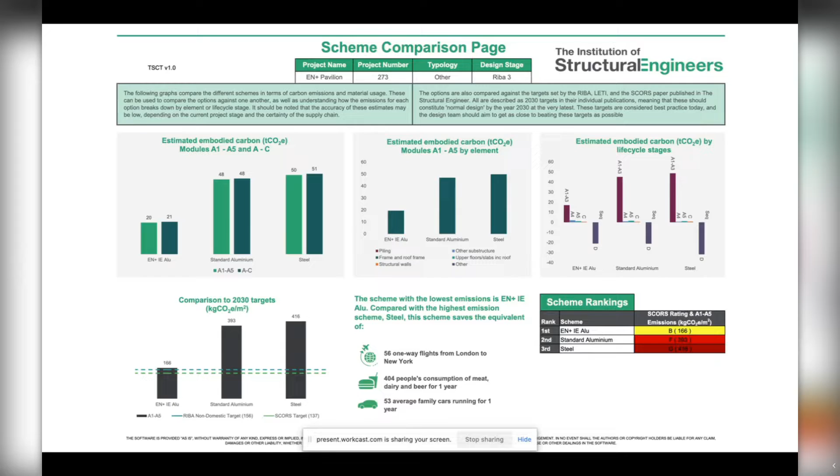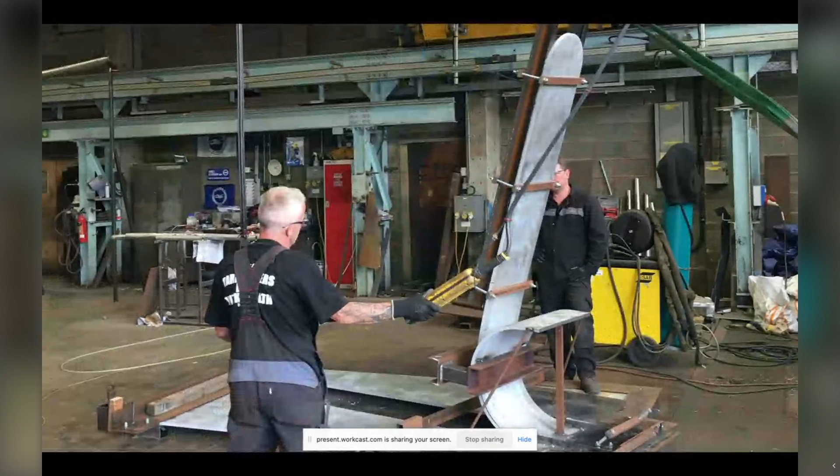Fabrication started - there's some really nice details, stress relieving, corner teardrops. It's a combination of digital technology and craft - it was built by men with a blowtorch and a bending machine, which is quite a nice combination of the digital and the hand. It was built on time. There it is in its context in the pool of the Biennale.

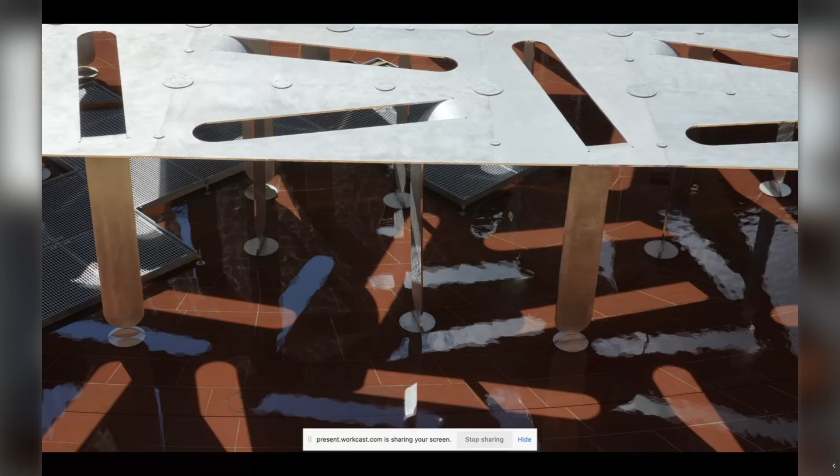The detailing reflected exactly what we hoped it would, so that was a great outcome for what was an incredibly fast-paced project. And I think the last project, I've shown this quite a lot, and I'm tempted to take it off presentations actually, but everyone likes this, in terms of timescales and how on earth do we deal with this.

This is the central temple for Burning Man 2018. Architect Arthur Mamou-Mani, a French architect who lives in London, won - having been to Burning Man and built structures over a number of years, which we were also responsible for. He was awarded the Central Temple, one of the major elements of the Burning Man Festival. His vision was for this 50-meter clear span timber structure, which would be a spiritual space where you'd go and leave messages for loved ones, and whatever people do at the Burning Man Festival, which I'm not allowed to go to.

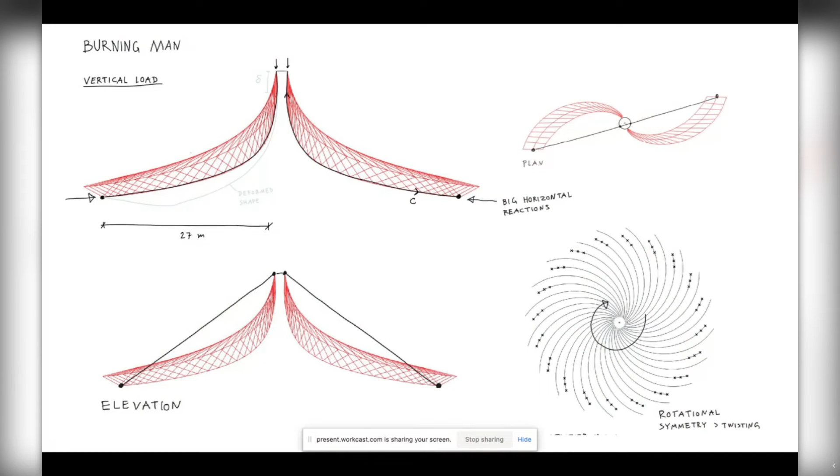It's another story, and again it's about decomposing this into simple pieces and understanding what the geometry does to the structure. The big move here in terms of simplification was to say, rather than go for the traditional triangulated timber structure with a complicated steel node, is there any way we can actually prefabricate simple triangles that can be cut and made in a machine shop in the nearest city, which is Reno, brought to site, and then assembled by volunteers into the final structure.

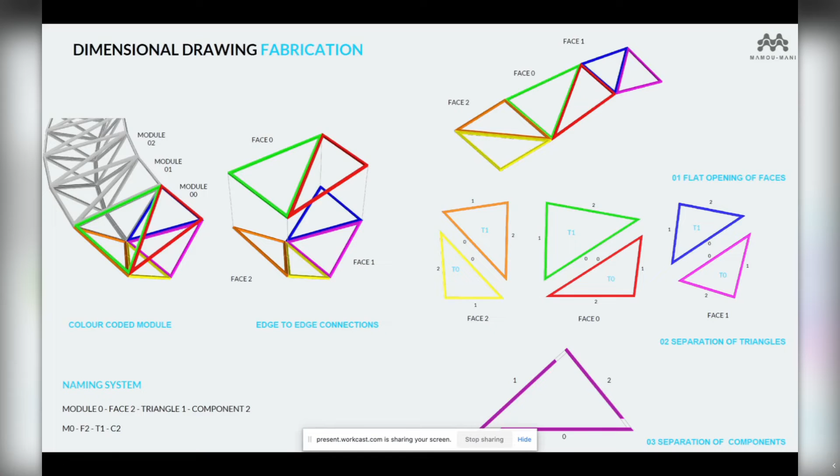That was the aim. We did a whole bunch of work on engineering optimization, automatically reducing every member to the smaller size, and so on. But what we found was actually that was counterproductive, because it meant there was a parts list so complicated it was almost impossible to do on site.

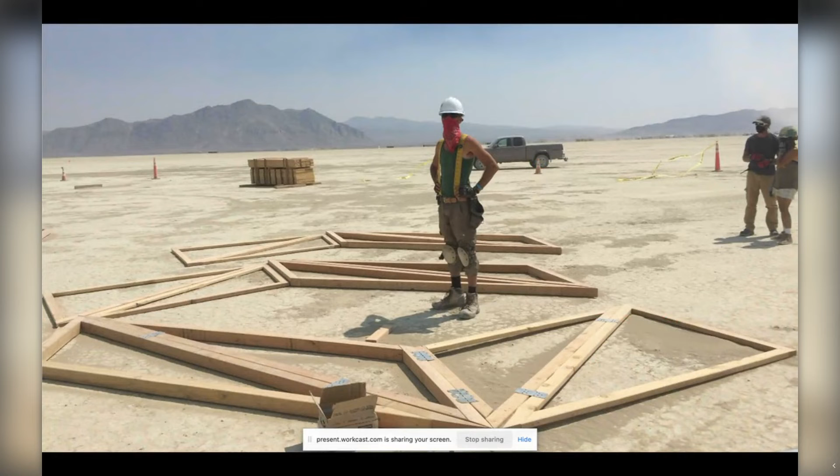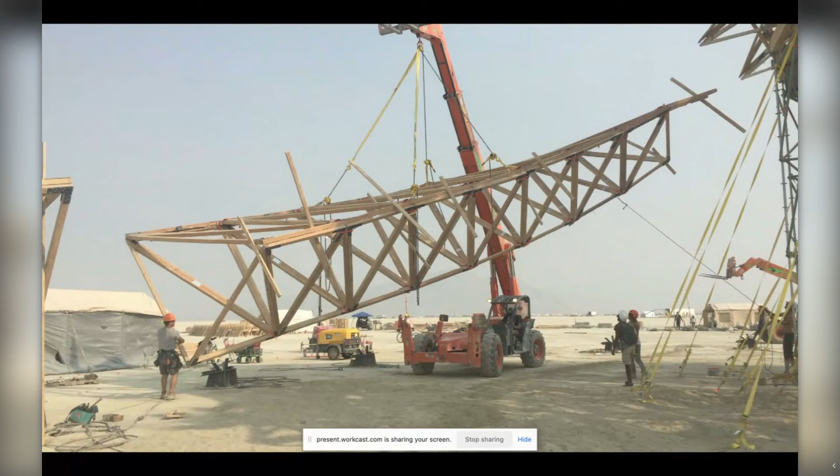So we ended up just going for two sizes, arranged as efficiently as possible: a small piece, a 2x4 inch piece, and a 4x4 inch piece. Work started, the triangles arrived on site, they were assembled into modules, the modules were assembled into what's called banana trusses, and the banana trusses were then arranged around the central hub.

And this is all volunteers. In this instance, they did have access to some plant. Again, these are people who, as I said, were architecture students, employees of Google, Boeing, and various other people. And that was it—it was built.

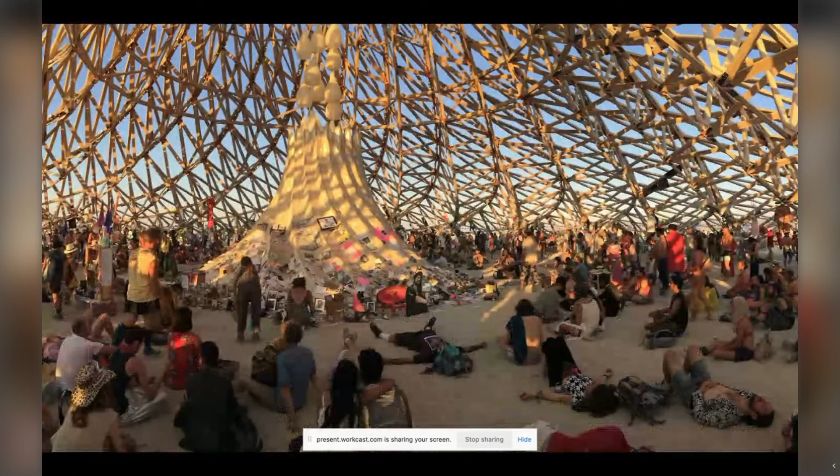And then the joke is, and what we always like saying, it took us 9 months to design it, 2 months to build, maybe, and it was up for 5 days, and then they burnt it. Slightly disheartening, but quite good fun in the sense that where we'd made structural decisions as to which parts of the elements needed to be reinforced, etc., some of the elements were burnt first, and you could see the whole structure collapsing just how we predicted. So it was the ultimate real-world test of the structure.

And that's it for me. Thank you very much.

Thank you, Stephen. That was everything I was hoping it would be. Absolutely fascinating to see some of the insight and thoughts that you and your team put into your projects over there.

Right, we've got some questions coming in. I might just start with one from me, as I see we're lining up some other ones. There's lots of technology here—do you see applications of it? They always say, like, Formula One informs other kinds of motor engineering, for example. Do you see how we can practically use some of this knowledge to make our structures more efficient and perform better?